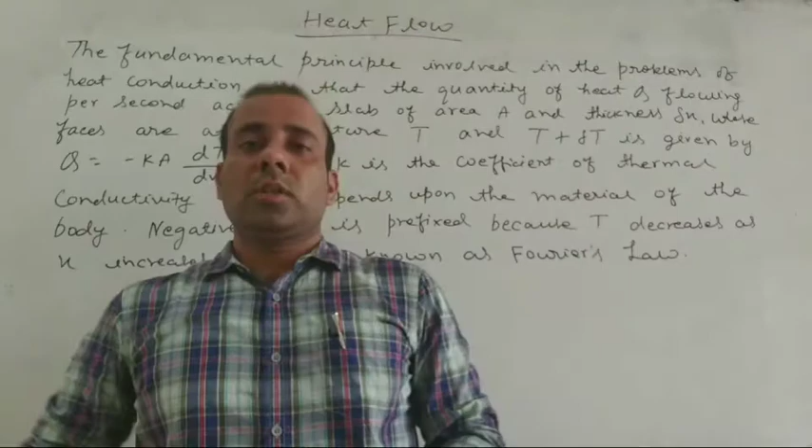So students, in today's video lecture we will discuss the topic heat flow. Okay, so let's see the topic.

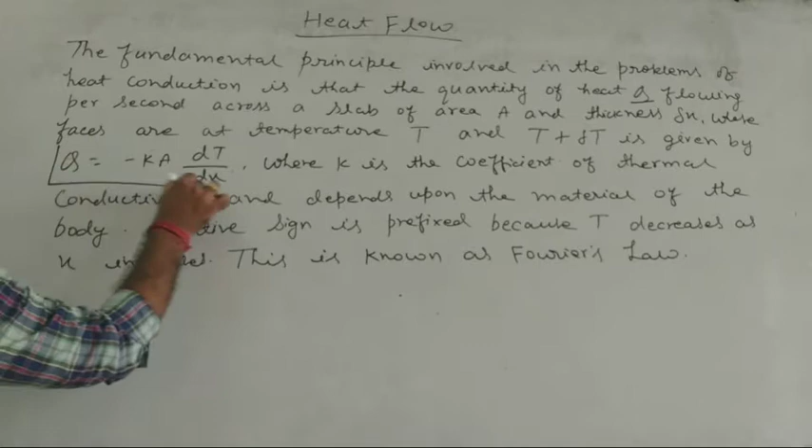The fundamental principle involved in the problems of heat conduction is that the quantity of heat Q flowing per second across a slab of area capital A and thickness del x, whose faces are at temperature T and T plus del T, is given by Q equals minus K into A into dT upon dx, where K is the coefficient of thermal conductivity and depends upon the material of the body. Negative sign is prefixed because T decreases as x increases, and this is also known as Fourier's law.

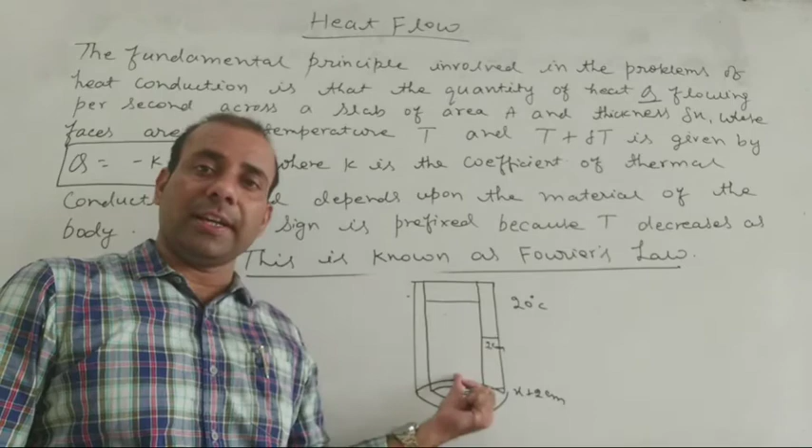If we understand this by an example: if we have taken a cylindrical body whose thickness is about 2 centimeters, then if the inner radius is x centimeter, the outer radius is x plus 2 centimeter. Now if we heat the outer surface, and suppose the temperature of the outer surface of this cylindrical body is 20 degree Celsius, then what should be the temperature of the inner surface? Will both have the same temperature?

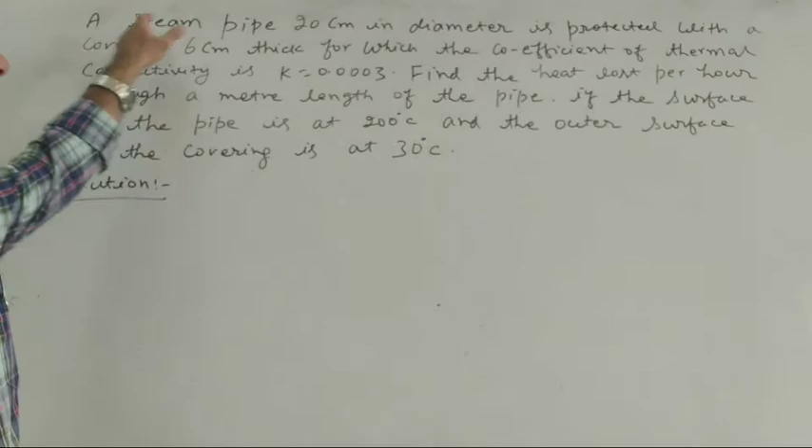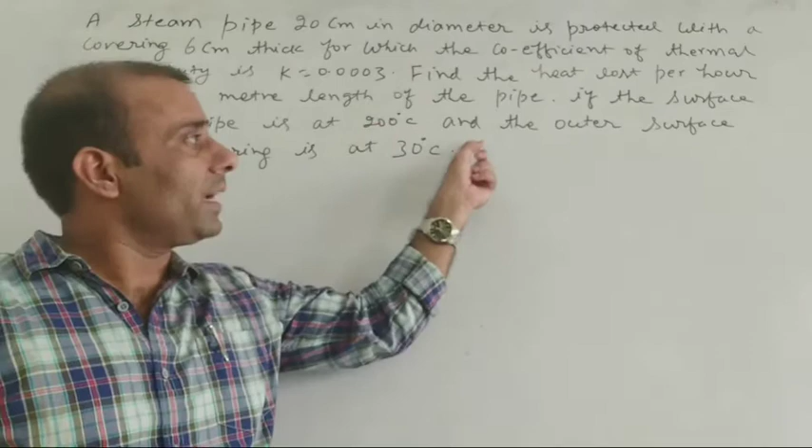...protected with a covering 6 centimeter thick, for which the coefficient of thermal conductivity is K equals to 0.0003. Then find the heat lost per hour through a meter length of the pipe if the surface of the pipe is at 200 degree Celsius and the outer surface of the covering is at 30 degree Celsius.

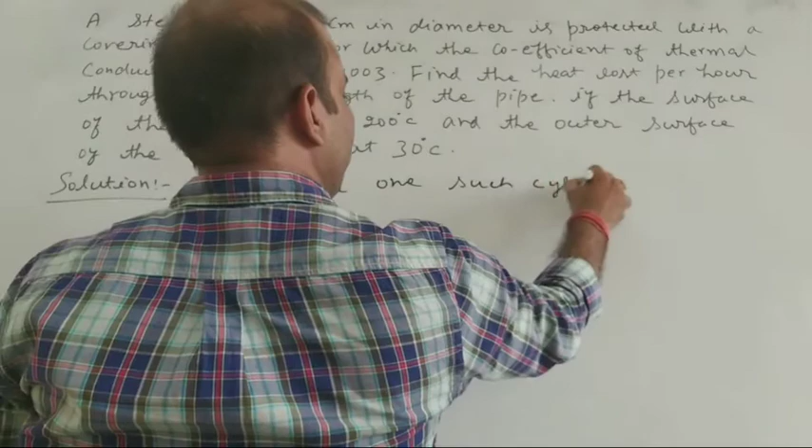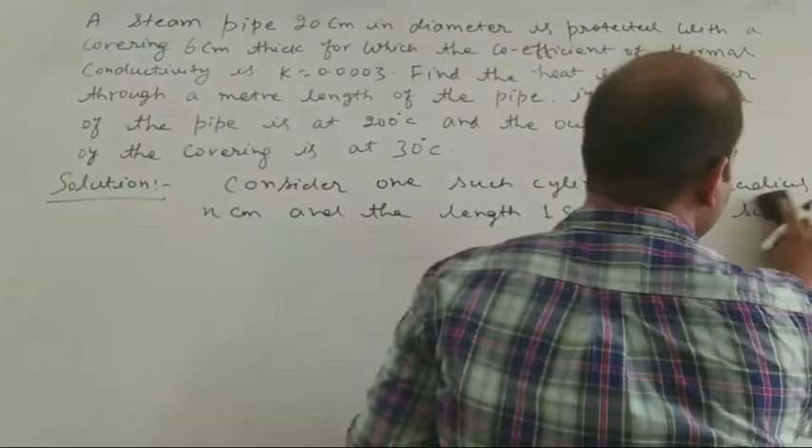Consider one such cylinder of radius x centimeter and length 1 centimeter. Then the surface area of this cylinder is A equals to 2 pi R H.

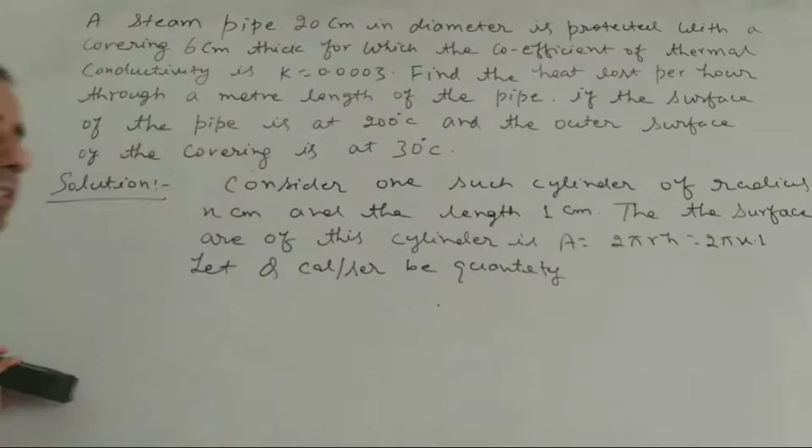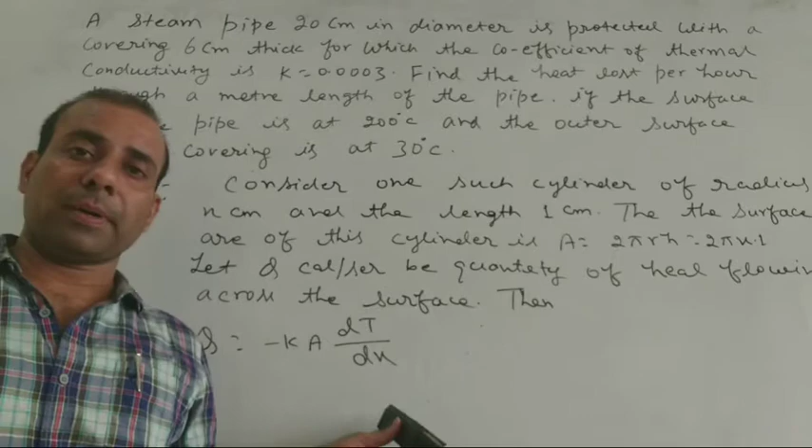Now let q calorie per second be the quantity of heat flowing across the surface. Then from the formula, capital Q equals to minus k into a into dt upon dx. This is our heat flow formula that we studied earlier.

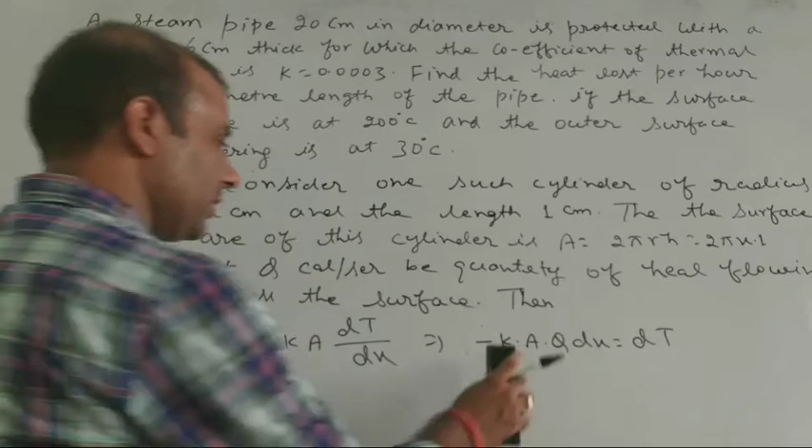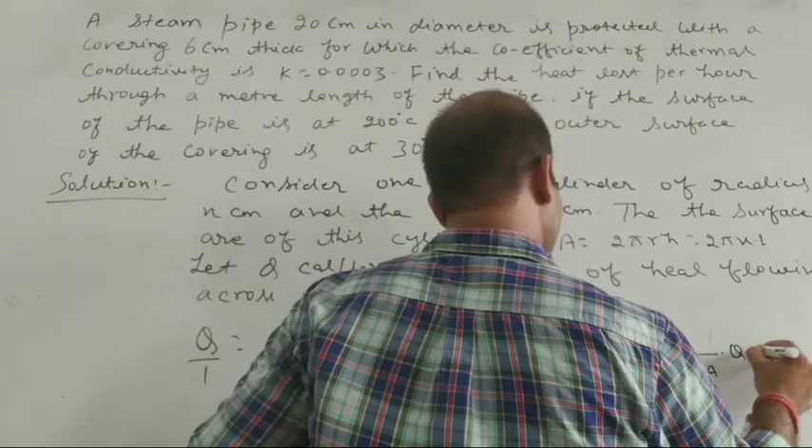Now we have to put the value, so this q equals to, or minus k into a into q into dx equals to dt by cross multiplication. Minus q into, sorry, it will be equivalent to q upon minus k into a equals to dt upon dx, so it can be written as 1 upon minus k into a into q into dx equals to dt.

It's not visible on this side, so it can be written here that q upon minus k into a into dx equals to dt.

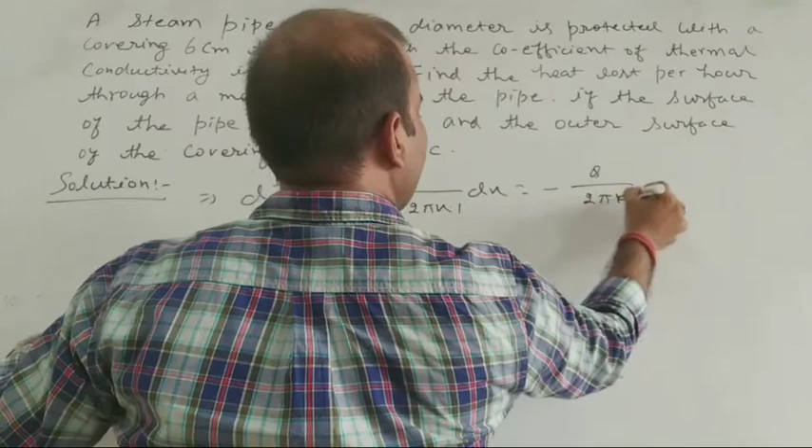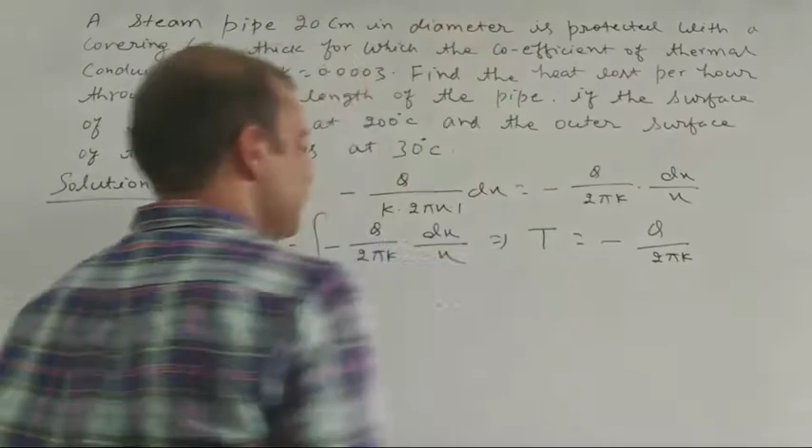It means d of t equals to minus q upon 2 pi k and this is dx upon x. Now integrating both sides, we have integration of dt will be t, and minus q upon 2 pi k as constant times integration of dx by x. Integration of dx by x will be log x plus some constant. So minus q upon 2 pi k, this is log x plus some constant. Yahan base mein hum e le lete hain because it is a natural log. So this is the value of t.

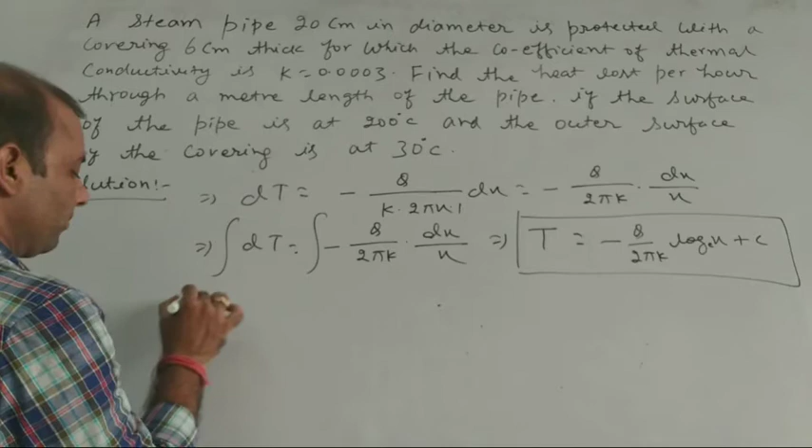Now the next condition is: a steam pipe 20 centimeter in diameter. So inner radius, x equals to 10 centimeter. Diameter is 20 centimeter, so radius equals to diameter by 2. So radius equals to 10 centimeter, that is inner radius, x equals to 10 centimeter, and k ki value baad mein hum put kar lenge. At inner radius, temperature of the pipe is 200 degree Celsius, so T equals to 200 degree Celsius.

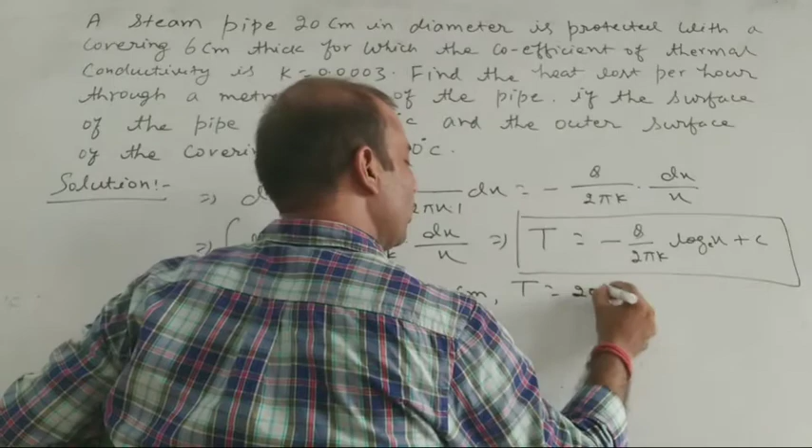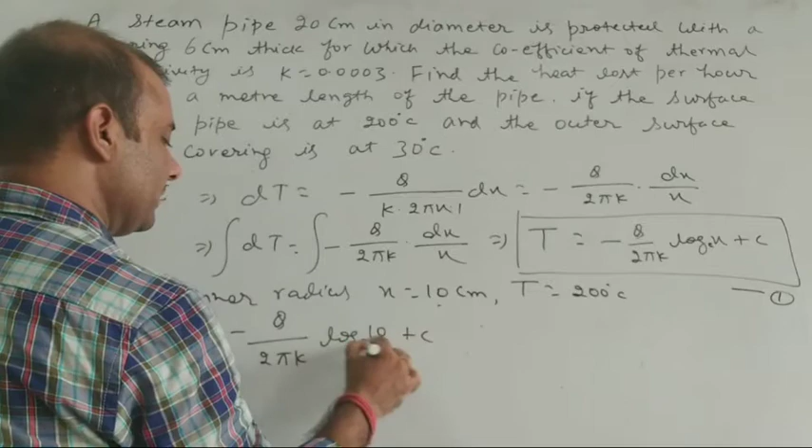So putting these values in equation number 1, we have 200 equals to minus q upon 2 pi k into log of 10 plus c, and suppose this is our equation number 2.

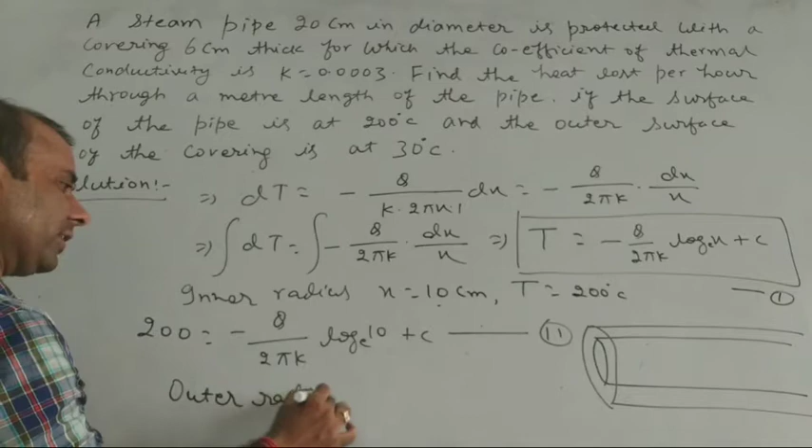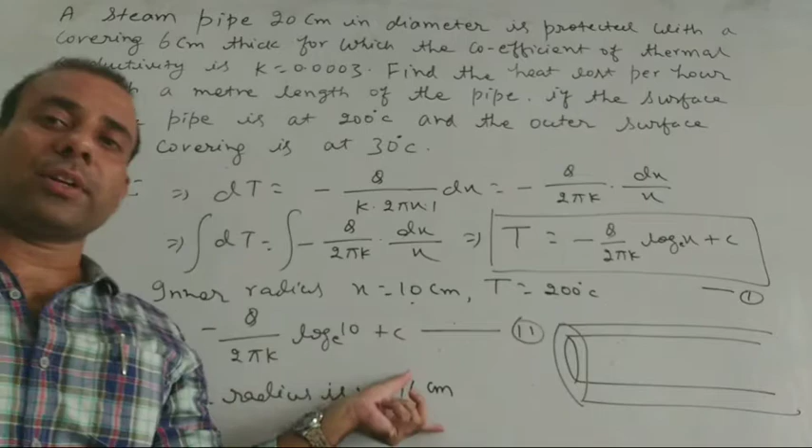Next, now we have outer radius is protected with a covering 6 centimeter. Agar hum ek figure draw karein, so we have this one, inner radius is 10 centimeter, so outer radius equals to x equals to... Now outer radius, since covering is 6 centimeter thick, outer radius is x equals to 16 centimeter. Inner radius diameter is 20, so inner radius is diameter by 2, that is 20 by 2, so 10. Now thickness is 6 centimeter, so 10 plus 6, that is outer radius, 16 centimeter.

Now we have to again find the equation. So now we have x equals to 16, then T equals to, outer surface temperature is 30 degrees Celsius, so T equals to 30 degrees Celsius. Now apply this value in this equation, so we have 30 equals to minus q upon 2 pi k into log 16, suppose plus c. Suppose this is equation number 3.

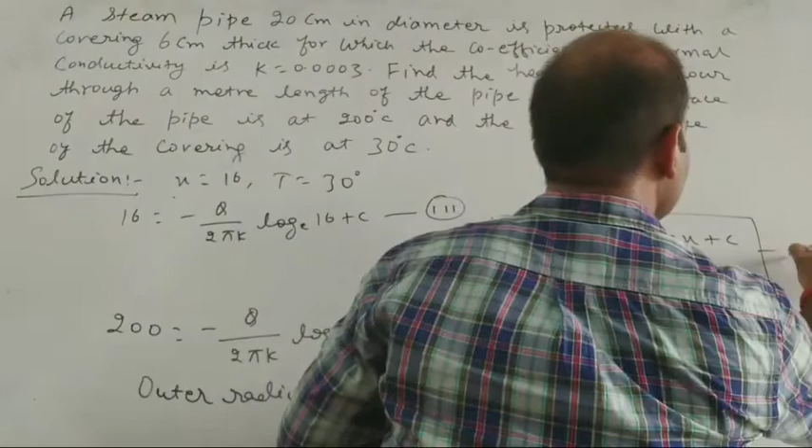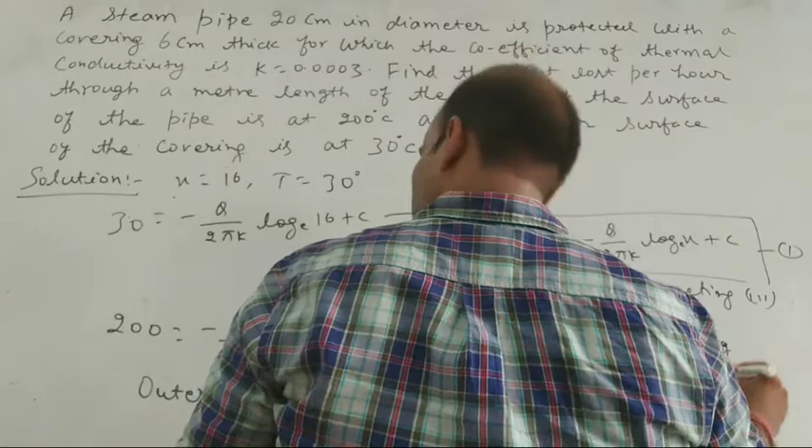Now subtracting equation 3 from equation number 2. So we have 200 minus, t is 30, t ka value hamara 30 hai. So 30 equals to, that is 200 minus 30 equals to minus q upon 2 pi k log 10 base e plus c.

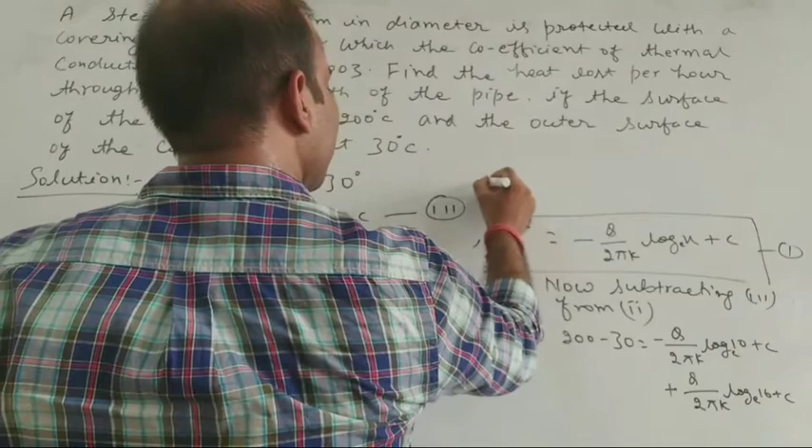Minus this one, minus plus q upon 2 pi k log 16, log e base 16 plus c. So it is equivalent to, is equation ko bhi hum yahan note kar lete hain because maybe aage humein use karna pade. Equation number 2 is 200 equals to minus q upon 2 pi k and this is log 10 base e plus c. This is your equation number 2.

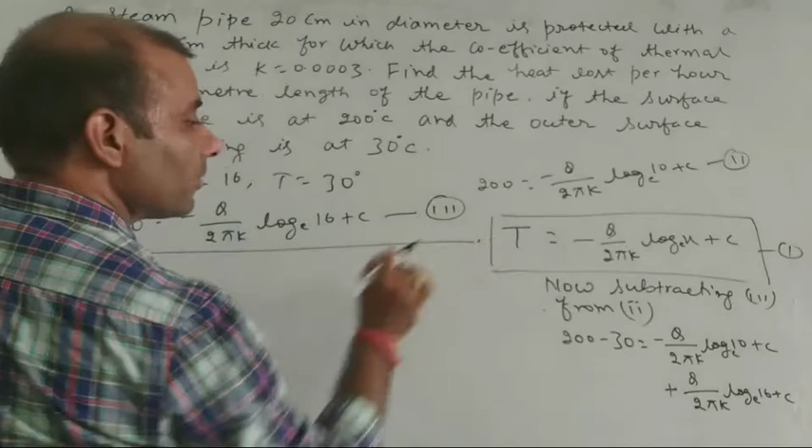Now solve this equation. So we have 200 minus 30, that is 170 equals to minus, and this is minus plus, minus c plus c minus c cancel. So we have q upon 2 pi k, is terms ko humne pehle likha log 16 minus log 10 base e. So this is the value of this one.

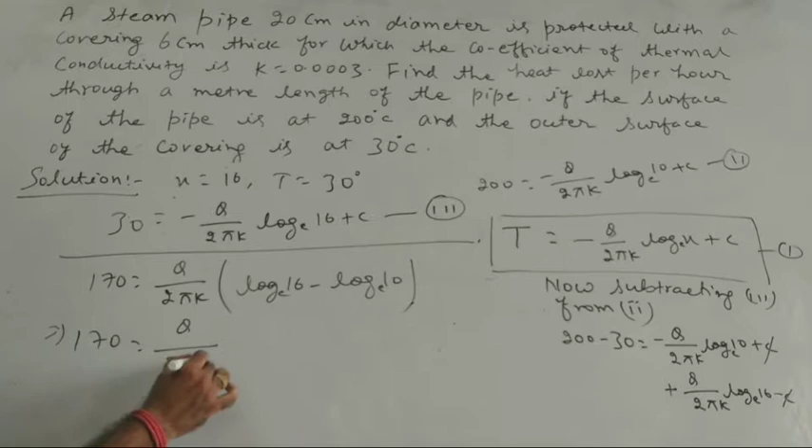Now 170 equals to q upon 2 pi k, log m minus log n, that is log 16 by 10 base e. So now this one equals to 170, 2 pi k into 170 equals to q into log 1.6. Therefore q equals to 2 pi k into 170 upon log 1.6. This is the value of q.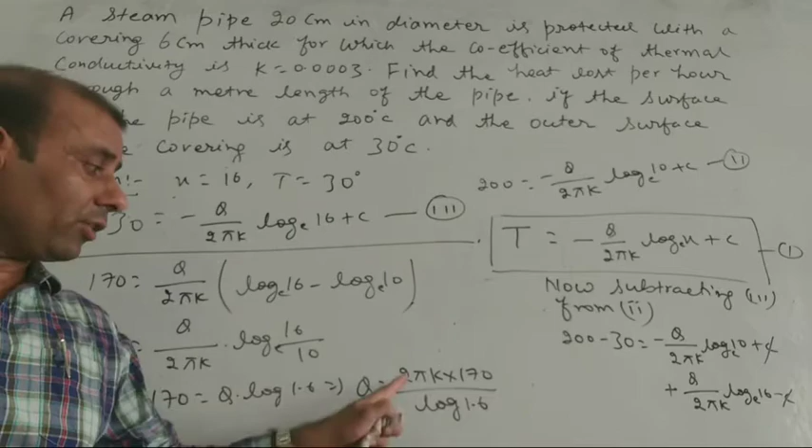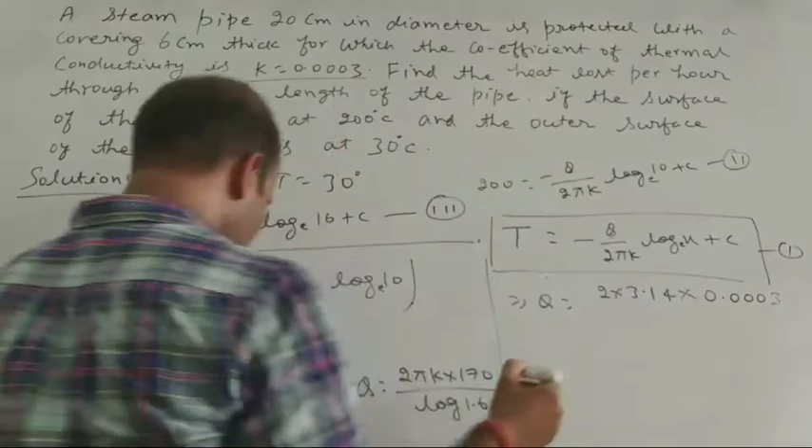Now putting rest of the values, therefore q equals to 2, value of pi is 3.14, and value of k, that is thermal conductivity, it is given that 0.0003. So q equals to 2 into 3.14 into 0.0003 into 170 by log 1.6 base e.

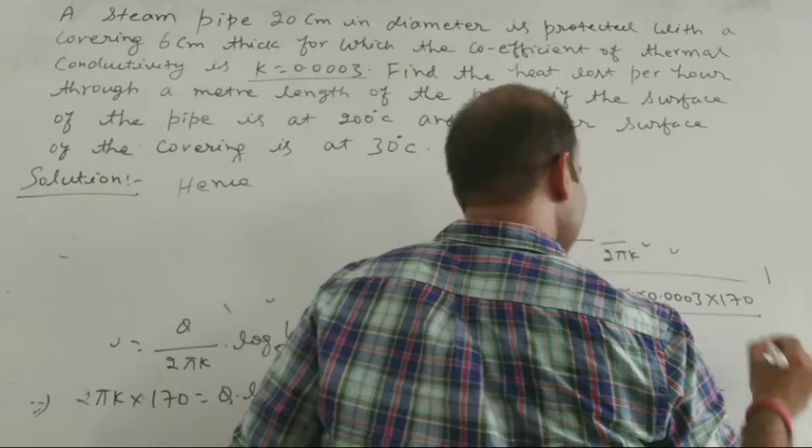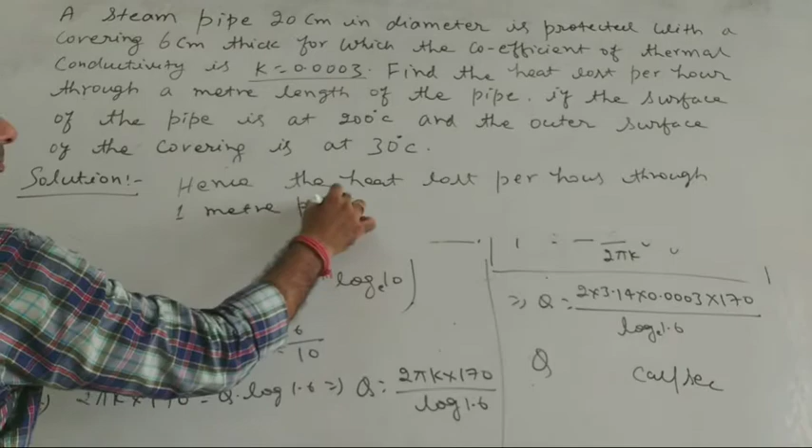per hour through 1 meter, through 1 meter pipe is Q into, capital Q into 1 hour, second ke liye hai, then multiply 60 into 60 aur ye 1 centimeter ke liye tha. Now we have to find for 1 meter that is 100 centimeter.

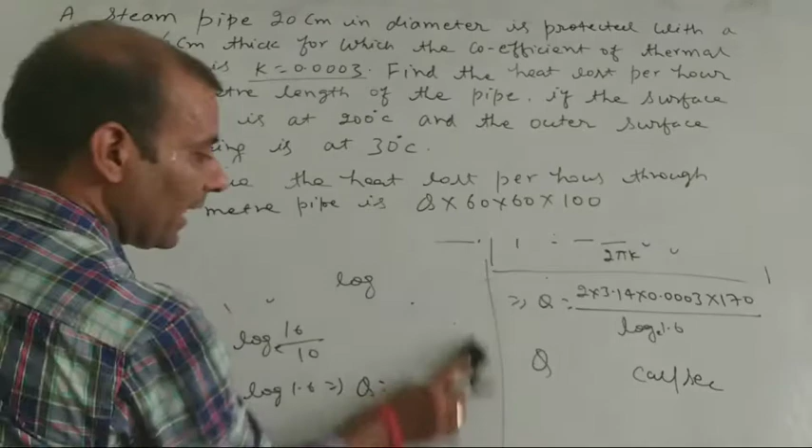Hence our final answer will be Q. Value of Q is 2 into 3.14 into 0.0003 into 170 upon log 1.6 into this value, that is 60 into 60 into 100. This will be your final value. So when you will solve this value, then you will get the answer, that is 245

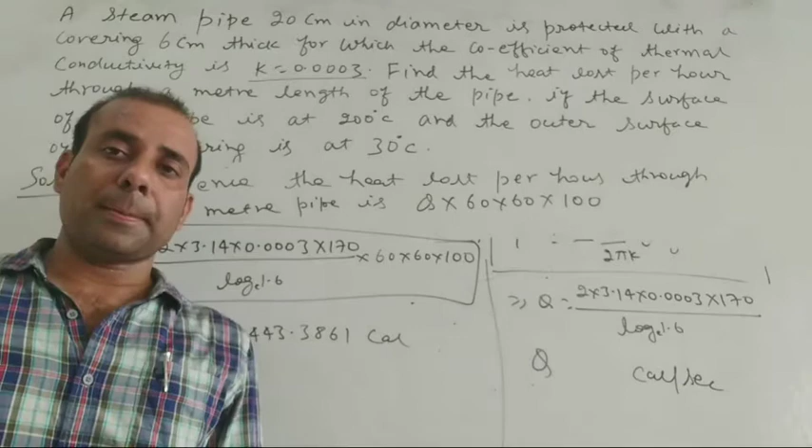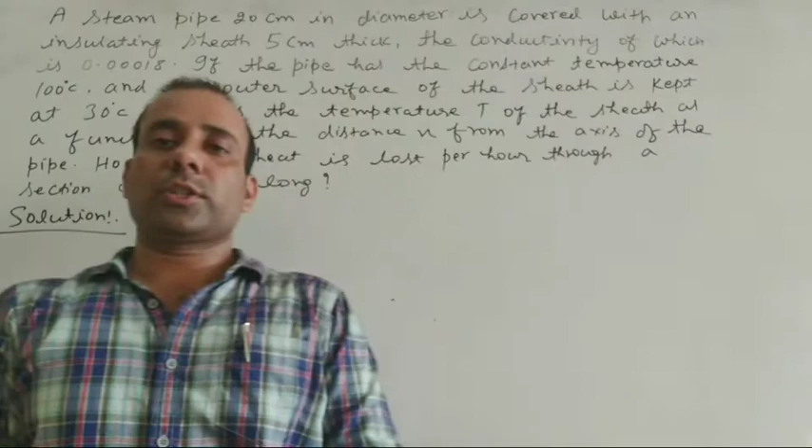Let's do another question. So students, next question is, a steam pipe 20 cm in diameter is covered with an insulating sheath 5 cm

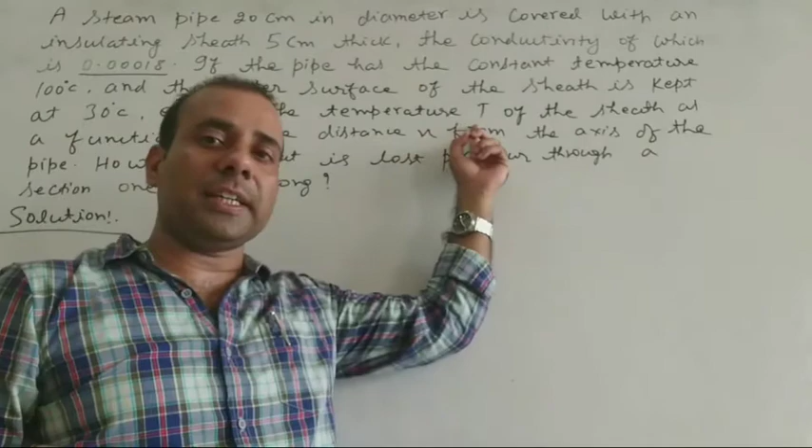thick, the conductivity of which is 0.00018. If the pipe has the constant temperature 100 degrees Celsius and the outer surface of the sheath is kept at 30 degrees Celsius, then express the temperature T of the sheath as a function of the distance x from the axis of the pipe.

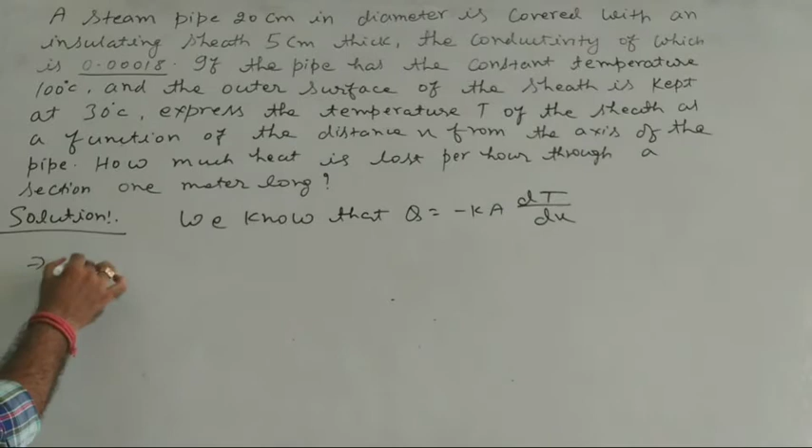Q equals to minus K into A into dt by dx. Therefore Q equals to minus K, A is 2 pi x into 1. Clear?

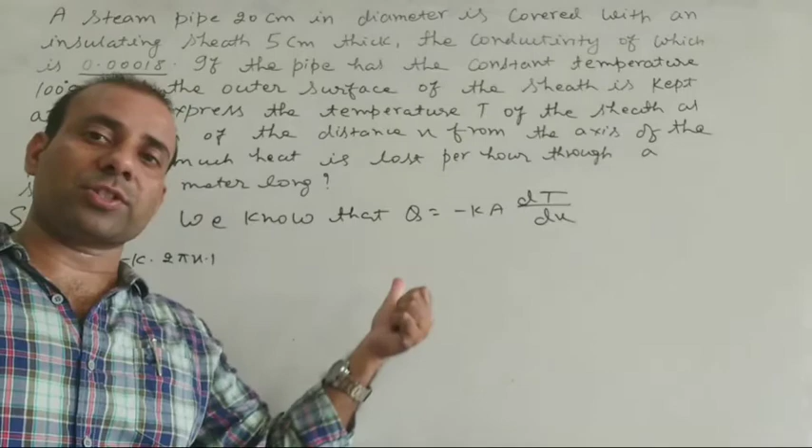Function of the distance x. To humne kya suppose kiya hai yahan pe. Consider one such cylinder of radius x centimeter and length 1 centimeter. Clear? Ye humne language pichle questions mein likha hai. Consider one such cylinder having radius x centimeter and length 1 centimeter. Then our A, that is curved surface area, will be 2 pi RH, that is 2 pi x.

So 2 pi x into 1 into dt upon dx. Clear? So it can be written as q upon minus k into 2 pi x equals to dt upon dx. So cross multiplication, we have minus q upon k

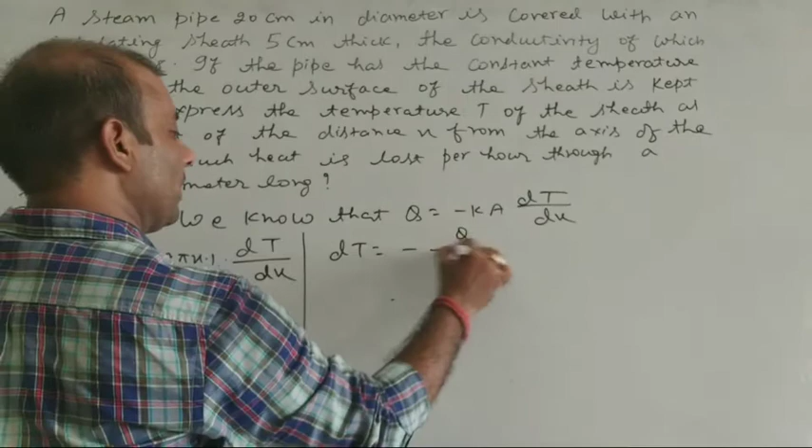2 pi x into dx equals to dt. So dt equals to, therefore dt equals to minus q upon 2 pi k into dx by x. 2 pi k is x ko humne dx ke upon mein put kar diya. Now integrating both sides, so we have t equals to minus q upon 2 pi k into dx by x will be log x base e plus some constant. Integration ke baad hum ek constant add karte hain.

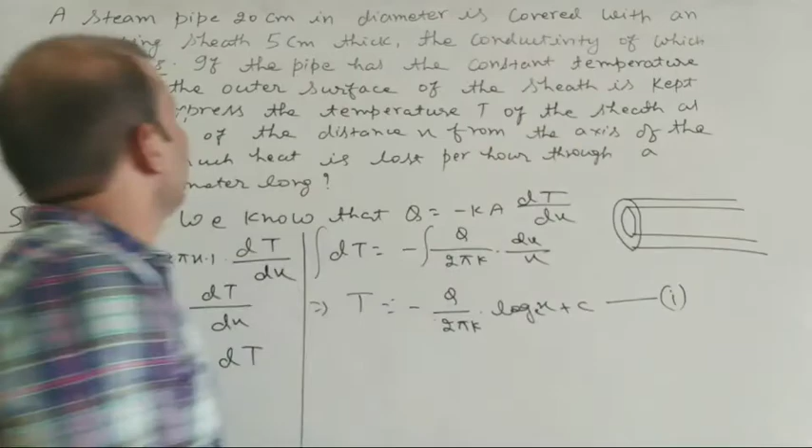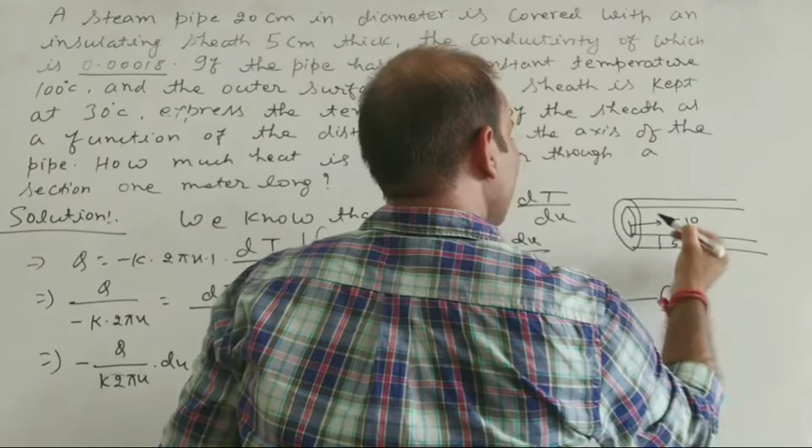Suppose that koi hamara cylinder hai, cylindrical body humne liya, and this is, to yahi bol raha hai kya, 20 centimeter in diameter is covered. It means this distance is r equals to 10 centimeter. Diameter 20 hai, then our radius will be 20 by 2, that is 10 centimeter is covered. This is the thickness of 5 centimeter. Therefore the outer radius will be, that is capital R, 10 plus 5, that is 15 centimeter.

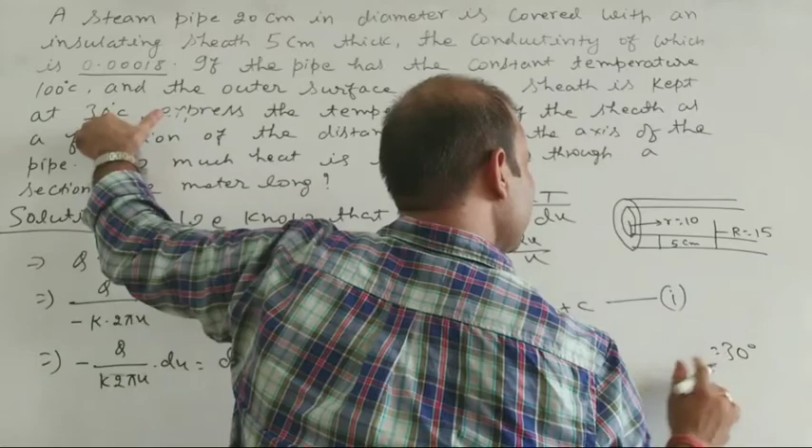So first one is inner radius, that is R, equals to R, or say x equals to 10 centimeter, and temperature, that is capital T, equals to, capital T hamara given hai temperature. If the pipe has a constant temperature 100 degrees Celsius, this inner temperature 100 degrees Celsius. Clear? And next one, outer temperature 30 degrees Celsius, T equals to 30 degree, when x equals to outer, that is 15 centimeter.

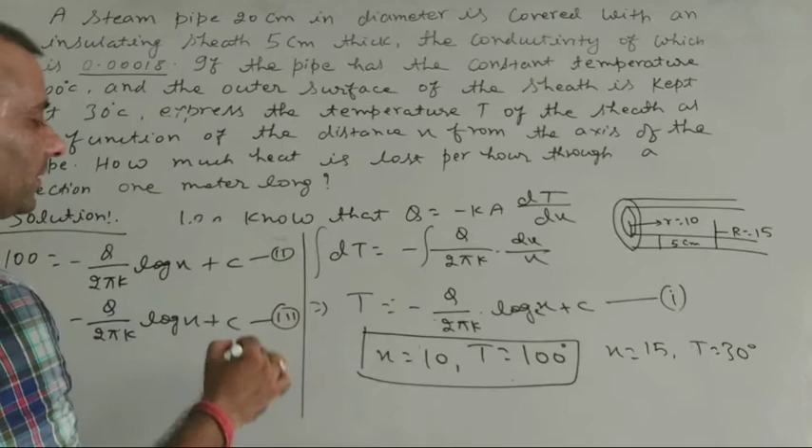Suppose this is equation number 2 and this is equation number 3. Now when you subtract 3 from 2, then you will get the value of q in terms of x. Clear?

Subtracting 3 from 2. So 100 minus 30 equals minus q upon 2 pi k log x plus c minus, minus log x plus c, minus minus plus q upon 2 pi k log x minus plus minus. Very simple. Plus minus c plus c cancel.

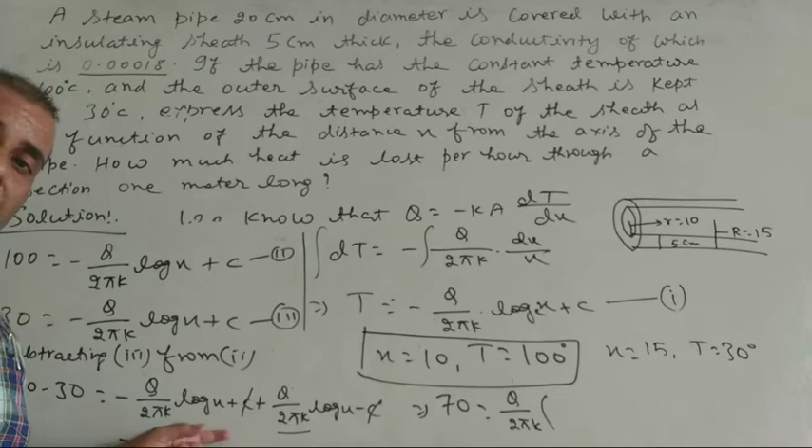So we have 100 minus 30, that is 70, equals to, taking q upon 2 pi k common, then first term log x minus log x. We have to put the value - because we haven't put the value of x, at one place we put x1 and at another place we put x2. So we have log x1 and log x2 minus log x1. Clear? So this is the value of q, or we can find the value of q again.

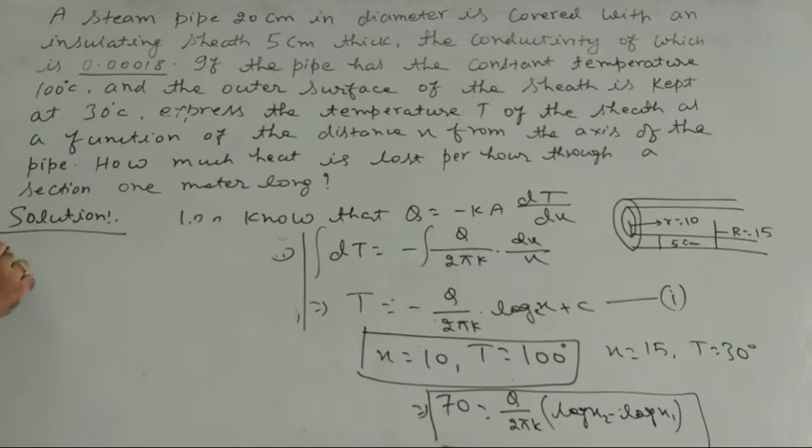So 70 into 2 pi k equals to q into log m minus log n, that is x2 by x1. So we have q equals to 140 pi k upon log x2 by x1. So this is the value of q in terms of x.

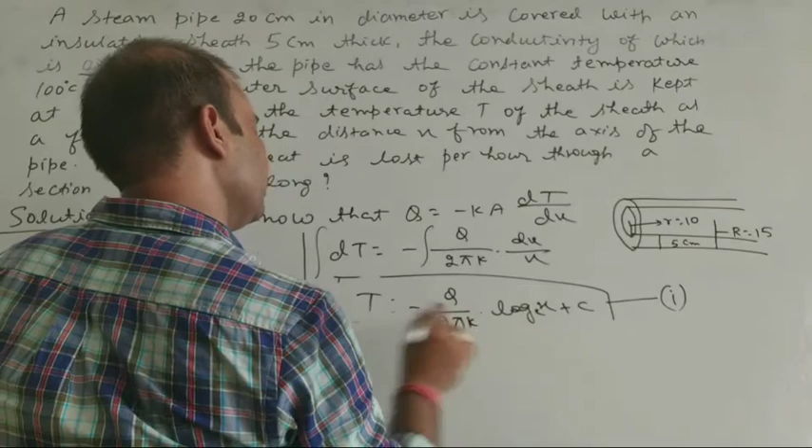Now t equals to this one, now put the value. First, capital T equals 100, when x equals 10 centimeter. So 100 equals minus q upon 2 pi k log 10 plus c. Very simple. And next, t equals 30 degree when x equals 15, outer radius. So this is 30 equals minus q upon 2 pi k into log 15 plus c. Clear?

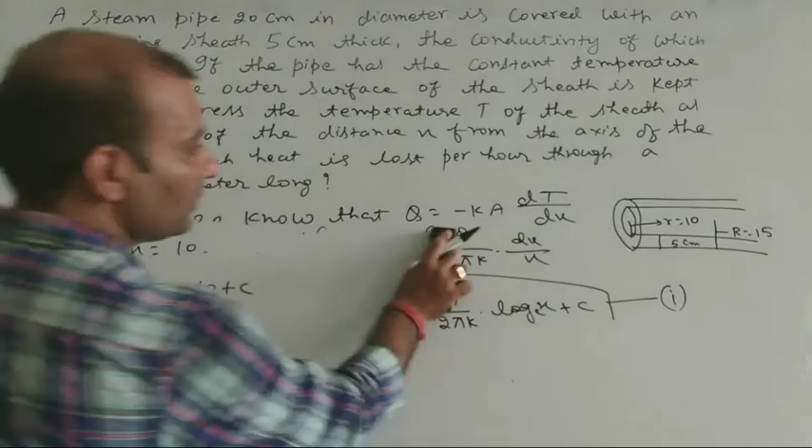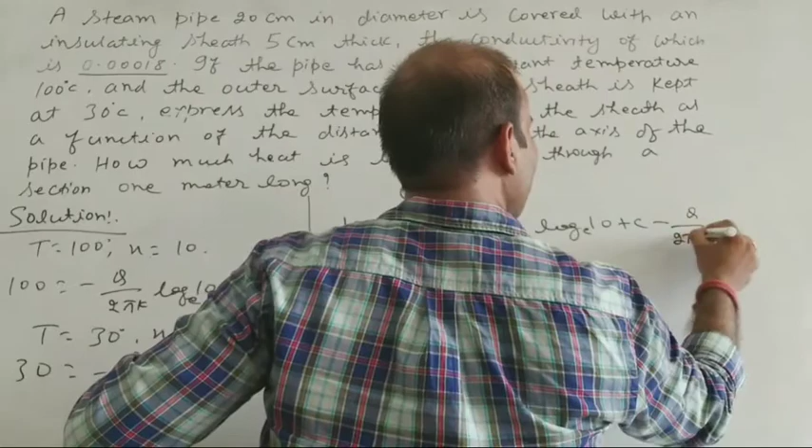Again, suppose this is equation number A and this is equation number B. Now subtract, a minus b, so we have 100 minus 30 equals minus q upon 2 pi k log 10 base e plus c, minus minus plus, so this is q upon 2 pi k log 15, and minus plus minus c plus c cancel. So we have 70 equals, and this is plus.

So q upon 2 pi k, that is log 15 minus log 10 base e, which is equivalent to 70 equals q upon 2 pi k, and this is log m by n base e. Again it is equivalent to q upon 2 pi k log 1.5.

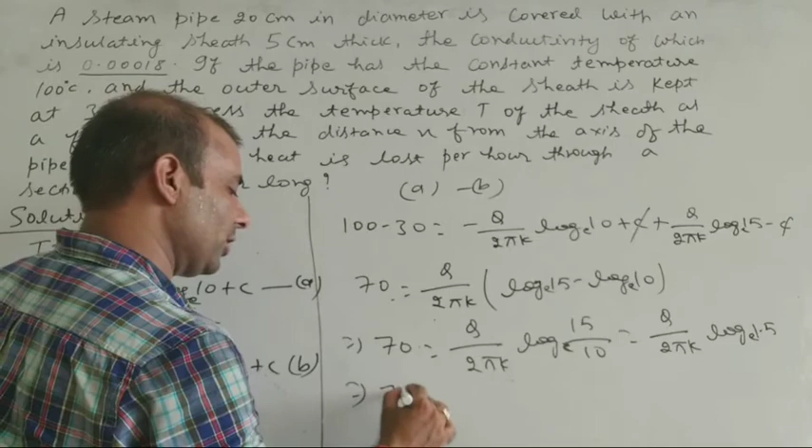Now by cross multiplication we have 70 into 2 pi k equals q into log 1.5. So q equals 140 pi k upon log 1.5, that is 140 into 3.14 into thermal conductivity, that is 0.00018 upon log 1.5. This is the value of q.

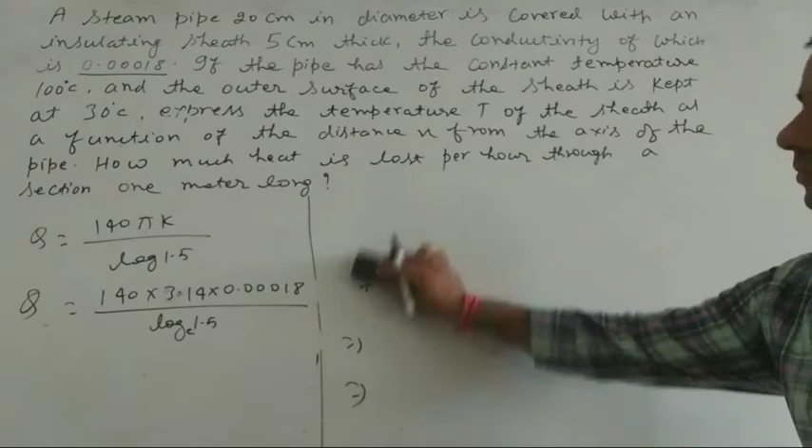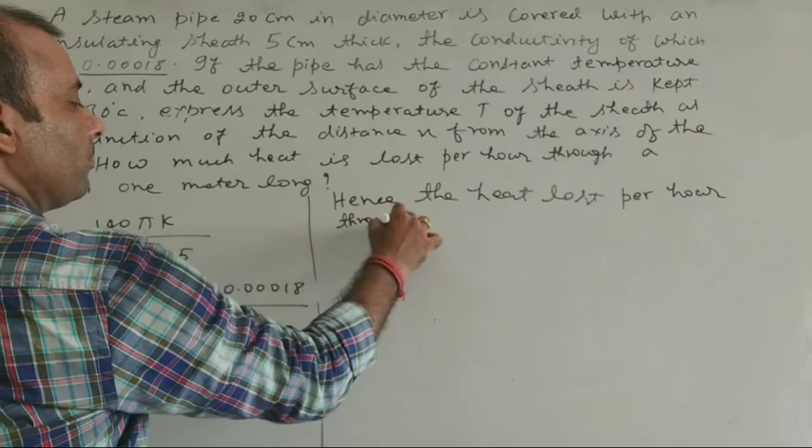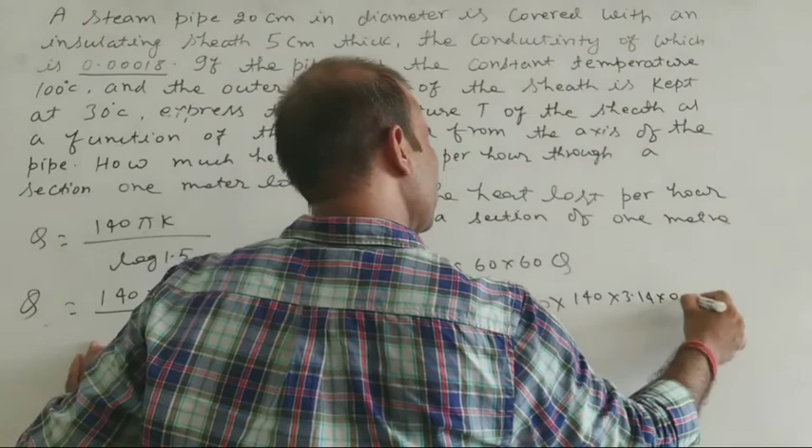Now we have to find the value per hour through a section of 1 meter. So hence the heat lost per hour through a section of 1 meter equals - for 1 meter we will multiply by 100. This is 100 into, and per hour, that is 60 into 60, into q. So this is 100 into 60 into 60 and value of q is 140 into 3.14 into 0.00018 upon log 1.5. This is the final value, and when you solve this, you get the answer, that is 70291 calorie. This is the final answer.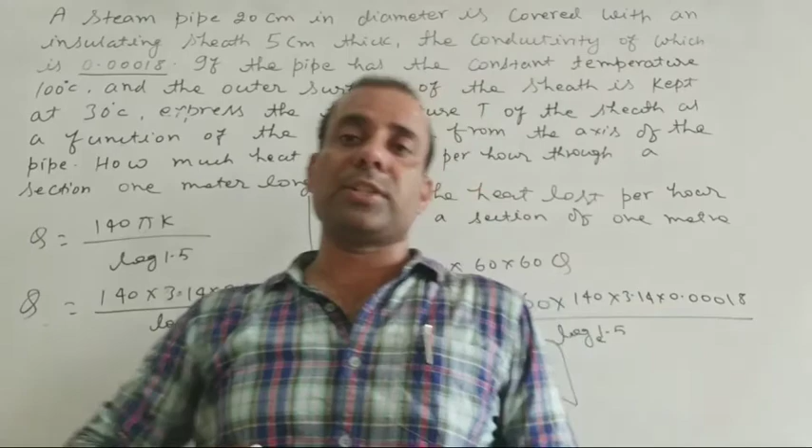Clear? So students, we have discussed applications of differential equations - first RL series circuit, second Newton's law of cooling, and third heat flow. So in applications of differential equations we have covered 3 important topics.